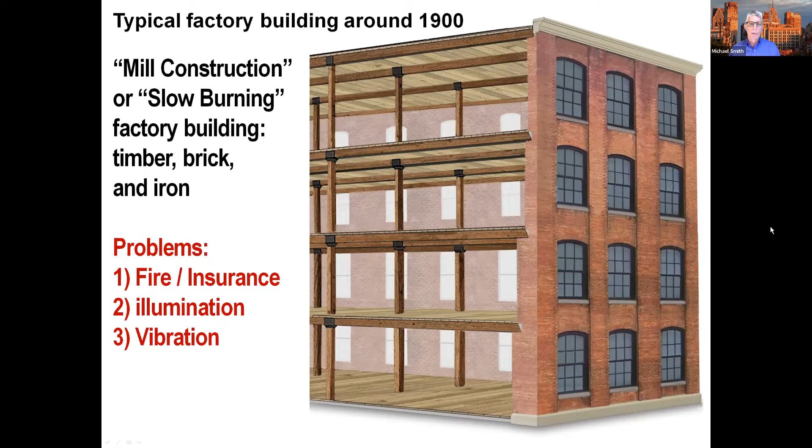So generally speaking, you had a very inefficient type of structure at a time when the industrial productivity of the country was rapidly increasing. Now, to give an example, this is the Michigan Stove Works building, constructed in 1890. It was a very typical type of structure that was used for industrial production at the time, around 1900.

It's a mill construction building with exterior brick supporting walls and an interior framework of timber and wood, wood floors, wood joists, and so forth. It was not the most efficient building, but it generally was a function of architecture at its time. And I should also mention that Michigan Stove Works was the largest stove manufacturing company in the country, if not the world.

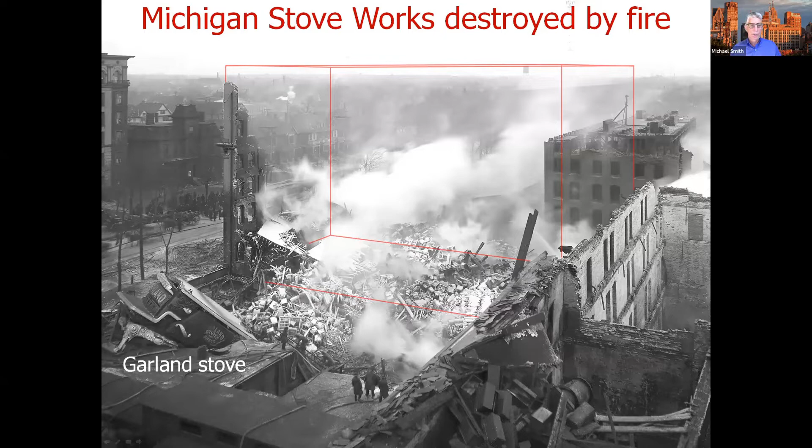Now, not long after the building was constructed, it was deconstructed. As you can see here, the massive building that you saw on the previous slide has been really reduced to not much more than an angular piece of brick from one corner of the building jutting up.

And also, if you look over here on the right, you can see a second building that's been gutted. And in this case, gutted is literally the correct word for what's happened to this building. All the timber within the building and everything else that was in the building has been burned out and turned to ash. So that was the essential problem faced in the early part of the century.

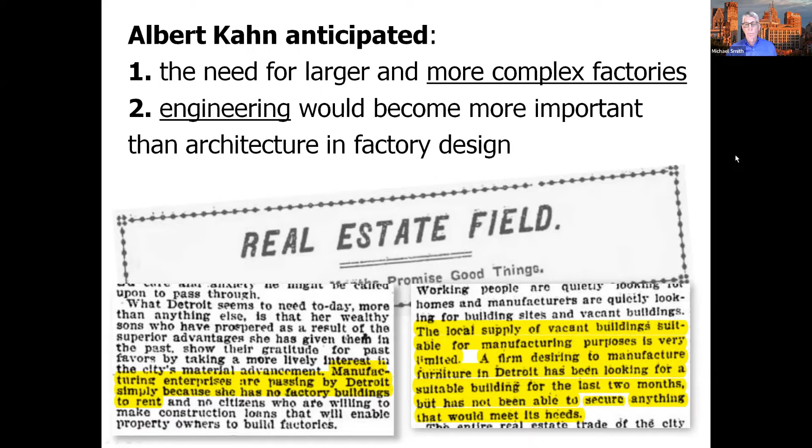And in an effort to get out in front of that trend, and both to avoid being pushed to the side by engineers and to acquire much more profitable business in designing factories and industrial type complexes, he did something that was relatively unprecedented. He hired, or I guess I should say more accurately, he partnered with his brother, Julius Kahn, a very skilled and experienced civil engineer.

Julius, unlike Albert, was able to attend college and acquire there a degree in civil engineering. He was able to do that in part because his education was financed by his brother, Albert. After leaving school, he spent some years working for a bridge company and I believe the Brooklyn Naval Yard. And then he spent a couple of years in Japan as a manager of a sulfur mining company. So he acquired not only business skills, but a great deal of experience in the engineering of steel structures, which he was quite skilled at doing.

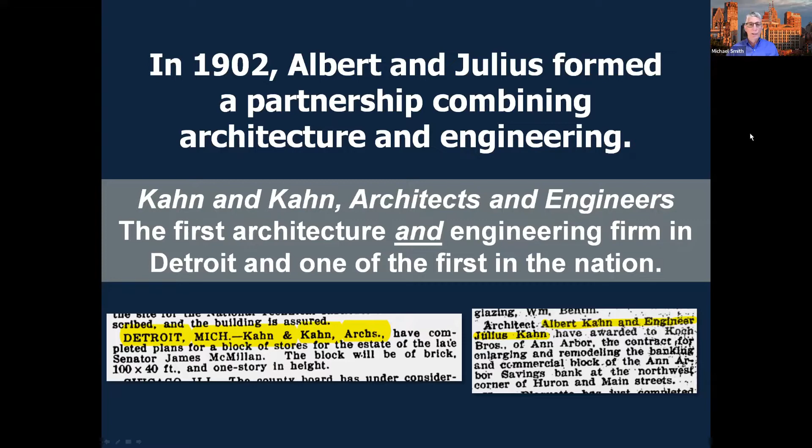So in 1902, Albert, envisioning that there'd be a place for a firm that combined both architecture and engineering, invited Julius to partner with him and form the firm of Kahn & Kahn, Architects and Engineers. And this was an important development because it was the first firm in the city of Detroit to combine both architecture and engineering. It was also one of the first in the nation. Generally speaking, architects didn't have engineers on staff. They would job out or hire from engineering consulting firms the expertise that they needed. So Albert had now under one roof the ability to both design buildings and to engineer factories as well.

The first major job that the two brothers secured was a factory that was actually quite significant. They had done work for the owners of the Packard factory prior, and as a consequence, were able to secure this commission. Now, what separated these brothers from many other architects was their understanding, their insight into the significant needs that manufacturing companies had. They needed the factories to be constructed quite rapidly so they could get into business manufacturing quickly in a very competitive environment.

That was extremely important. The buildings had to be low in cost because often they were replaced before they wore out. The maintenance and particularly the insurance and fire insurance costs had to be as low as possible. And the efficiency, the production efficiency had to be seen to in a very significant way. In other words, the less handling of materials, the less amount of labor needed by the manufacturers, the lower the cost of manufacturing would be, and consequently, the more profit or the lower price the manufactured product could be sold at.

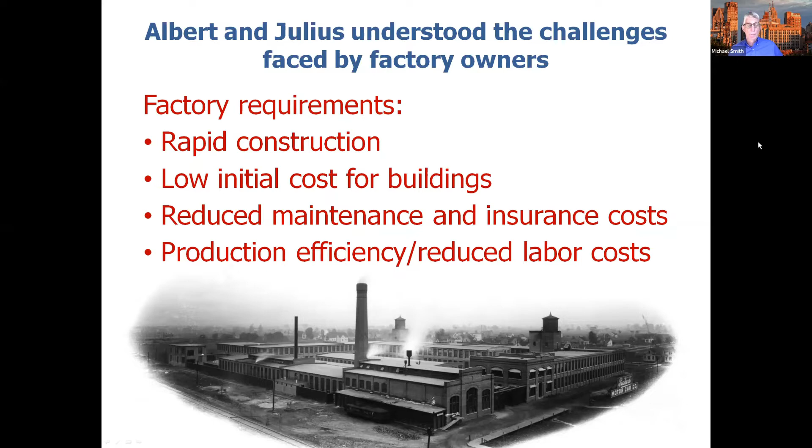The two brothers combined in designing this new Packard factory in a period of about 3 months, and they did a superb job of designing this factory. It was written up in a number of publications, both for the speed with which it was designed, the extremely low cost of the insurance, particularly the fire insurance, that was facilitated by the nature of the design of the factory. It was also designed with production efficiency in mind, that the workers, when they showed up for work, could enter the building right directly into their workstation rather than having to traipse through the entire factory and provide a distraction to other workers. So it was a very efficiently designed factory from the get-go.

And one of the interesting things that I discovered was that this was one of the only design drawings, this one that you see here in the slide, that included both Albert's name as architect and Julius's name as engineer. And the only reason that they would have done this really is to impress upon the customer, Packard Motor Car Company, that both architecture and engineering services have been brought to bear on the design of this factory, a concept that they were anxiously promoting to all manufacturers that they were attempting to get work from.

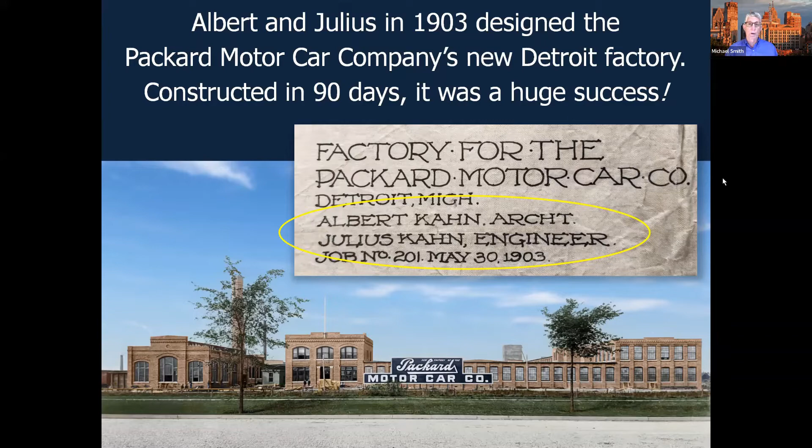But there was really nobody that knew how to install a reinforced concrete floor. So Albert hired the Cleveland Silex Stone Company to install the concrete floors. And Cleveland Silex, really their expertise was in sidewalks. And sidewalks, as you know, are typically laid on top of the ground or some other substrate that supports it from below. But in the Palms apartment building, the space between the floor joists, the concrete floor was unsupported.

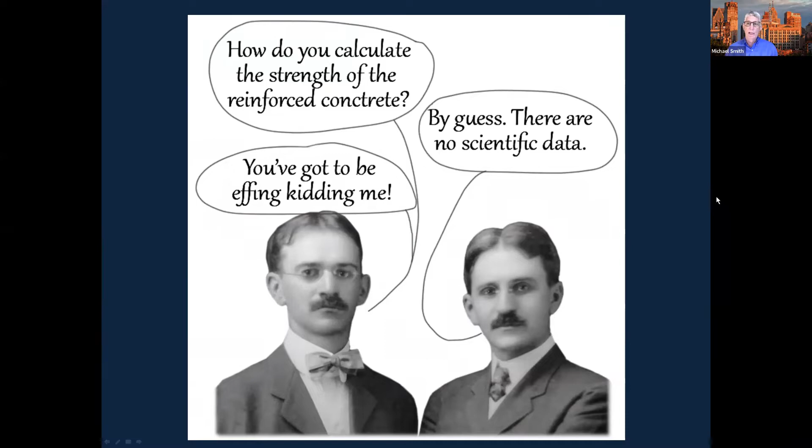So he asked his brother Albert. He said, "How do you calculate the strength of the reinforced concrete that we're using for the floor?" And Albert responded, "By guess. There's no scientific data." And Julius was just profoundly shocked by this, that you could construct something safely, you hoped, but not know exactly how safe it was.

Now, that set Julius loose on an intensive study of what was known about reinforced concrete at the time. And what he discovered was that you could build with reinforced concrete, as was the case. There were a number of architects and engineers that were building with reinforced concrete, and they were doing so by placing these steel rebars within the concrete. You can see this twisted bar here, which was the type used by an engineer by the name of Ernest Ransome.

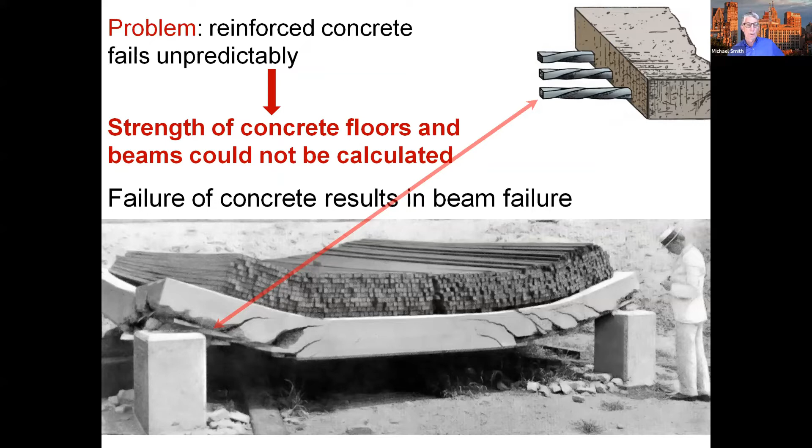And when these bars were tested by Julius, you can see the bar here. The bar has not snapped, but the concrete beam and floor has collapsed. And it's collapsed because of these cracks that have propagated up through the floor. So there was no way to calculate the strength of the floor because there was no way to calculate how strong the concrete would be before it cracked and tore loose from the steel reinforcing bar. So that was one of the problems that Julius foresaw that he had to solve.

Now, here's how he went about solving that problem. He understood, as everybody did, exactly how a beam functions when it's placed under a load, or when weight is placed upon the beam. What happens is the top of the beam is compressed and the bottom of the beam is stretched. As you can see with this drawing, it's maybe difficult for you to picture, but take my word for it, that's exactly what happens. Concrete can't stretch very much, so when it's forced into a position where it has to stretch, it'll begin to crack, and those cracks will at first be microscopic, but later on they'll become quite visible, and ultimately it'll lead to the beam failing.

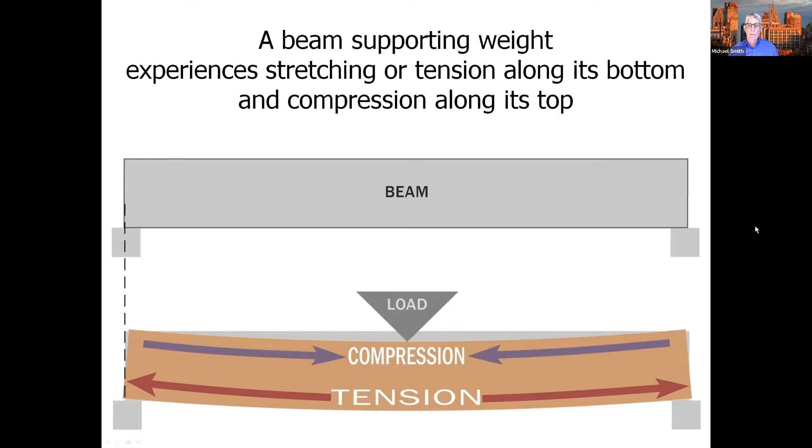Now, Julius, having worked extensively with steel structures, bridges, trusses, buildings, anything that could be built with steel, typically was often going to use a steel truss. And a steel truss is a girder or beam-like structure that's built up from a series of triangles, triangles being a very sturdy geometric figure that doesn't even need to be firmly attached at the three corners in order to maintain strength. Now, in a truss construction like you see here, the red parts of the steel are going to be in tension, like you saw on the beam, and the blue parts are going to be in compression, again, just like you saw in the beam.

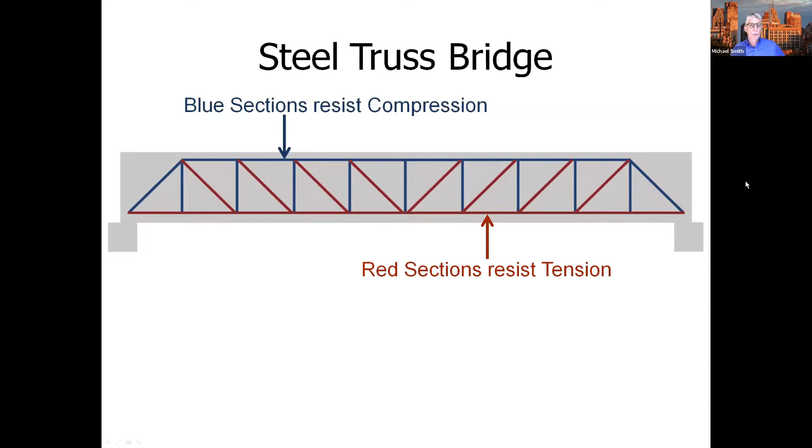So Julius imagined that you could take a truss like that, you could place it inside of a concrete beam, and the concrete beam obviously would be just as strong as the steel truss because it had the steel truss contained within it. He also realized that you could dispense with all of these blue parts of the beam because they're in compression. And because the steel is completely surrounded by the concrete, it would be able to absorb all the compressive stresses that are being placed on the beam. So you could do away with that section of the truss.

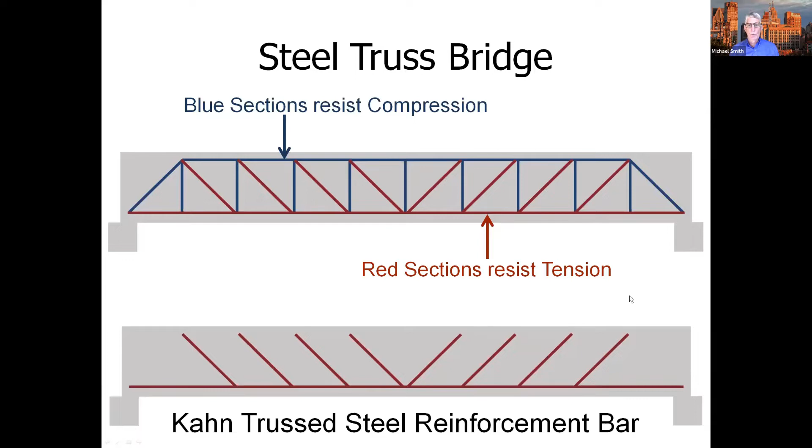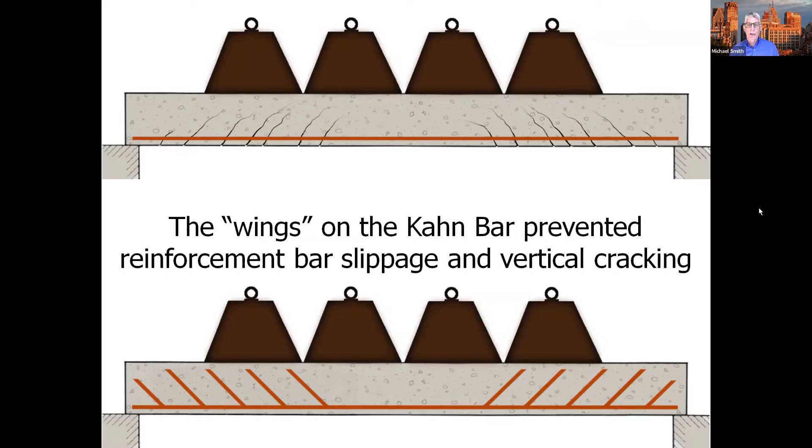So Julius then proceeded to test this theory out by building these combination beams and floors. And every time he piled the weight on top of the beam until it failed, it always failed right in the middle. And it failed not because the concrete cracked or broke, it failed because the steel that was contained within the beam reached the maximum stress and then snapped in half in the middle of the beam where the stress is the greatest.

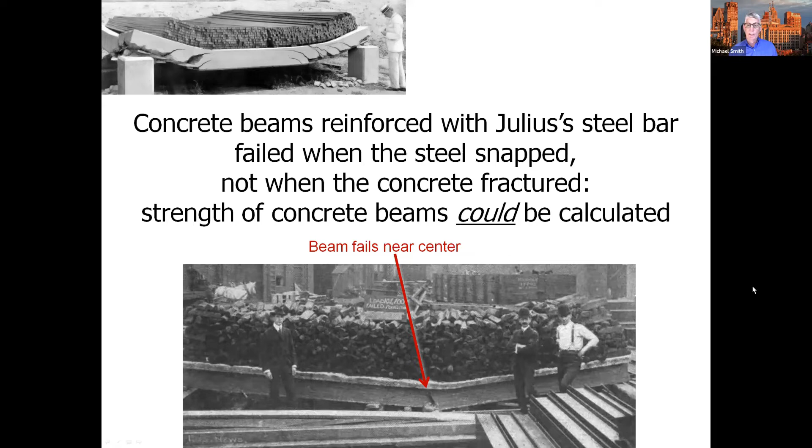And that meant that the weight that the concrete and steel beam could bear could in fact be calculated because the strength was based on the maximum strength of the steel, not on the point at which the concrete would crack and break apart. And as you can see right here, you have a very happy Julius Kahn, pleased with the fact that his theory has been borne out.

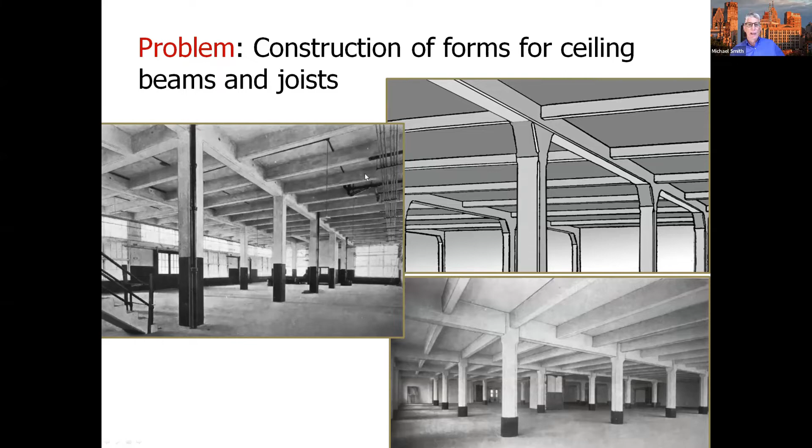Now, there was a second problem that Julius set out to solve, and that was the problem of building the wooden forms that would contain the concrete while it was curing and hardening. And you can see that all of these girders and beams and joists that had to be included that would contain the reinforcement bars, that would entail a great deal of form work.

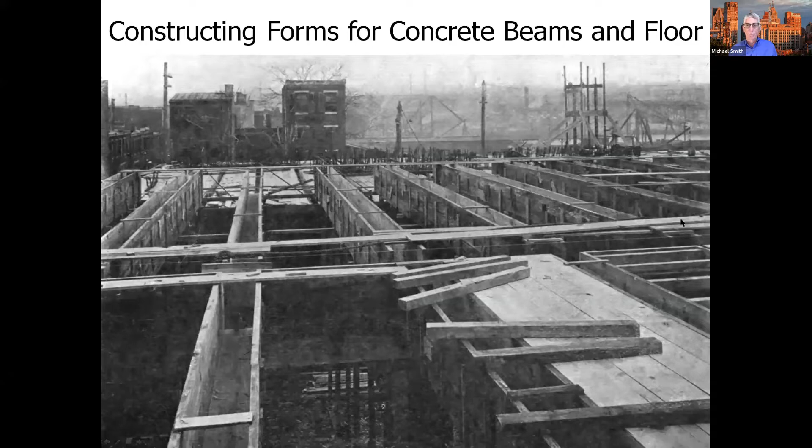So you see all these wooden forms that had to be constructed by many carpenters and used an enormous amount of timber to construct them. And it was essentially the greater part of the expense of building the concrete structure. And so he sought a way to eliminate all this wooden form building. And what he came up with was something that was quite ingenious.

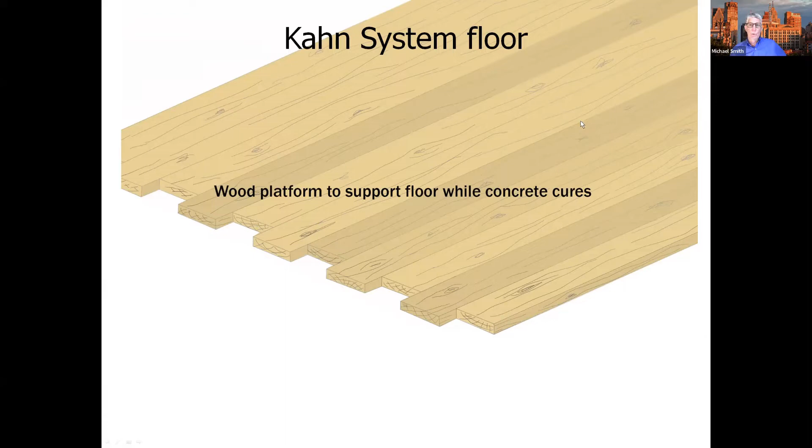Instead of building all that form work, you just simply build a platform of wooden boards like what you see here. This is in the era before plywood was invented. So it was just regular wooden planks that were laid out. And then on top of those planks would be laid these layers or lines of hollow terracotta blocks. And between each line of terracotta block would be placed one Kahn reinforcement bar.

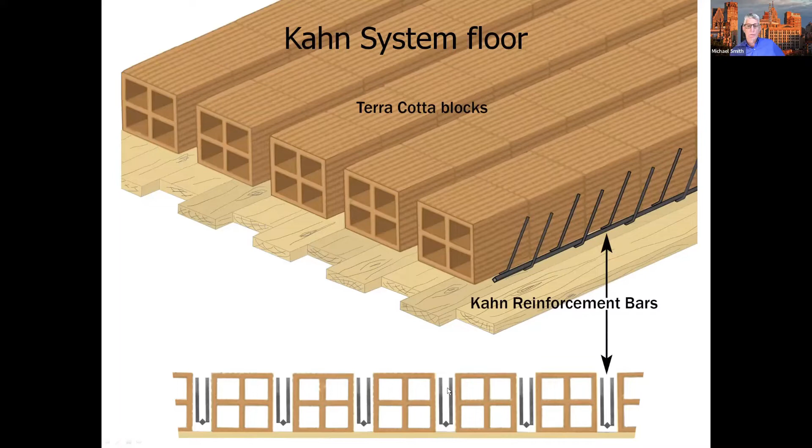And you can see in the end-on view what this would look like. You have the beams here. The floor is going to be up here as soon as you pour the concrete. And that's the finished floor right there. You have a floor with beams that are reinforced with the Kahn bar.

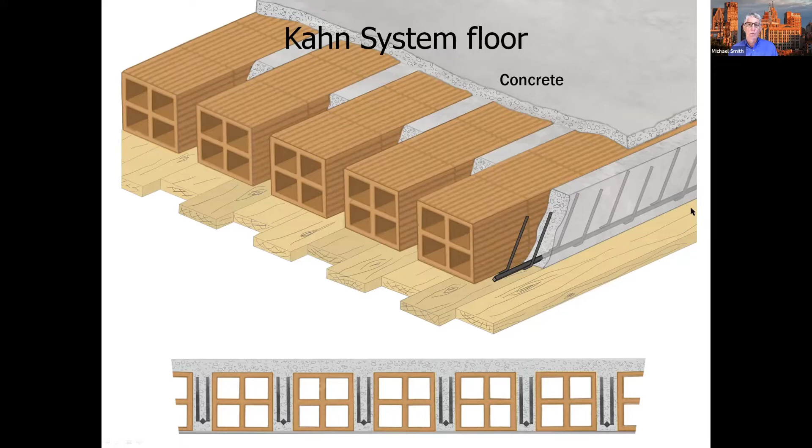So what you end up with is something that looks like this. This is a steel reinforced concrete beam. Here's a steel reinforced concrete floor. It's flat on the bottom so that it can be painted white, reflects the light that comes in from the windows to the outside. The area between the framework pieces is filled with terracotta blocks.

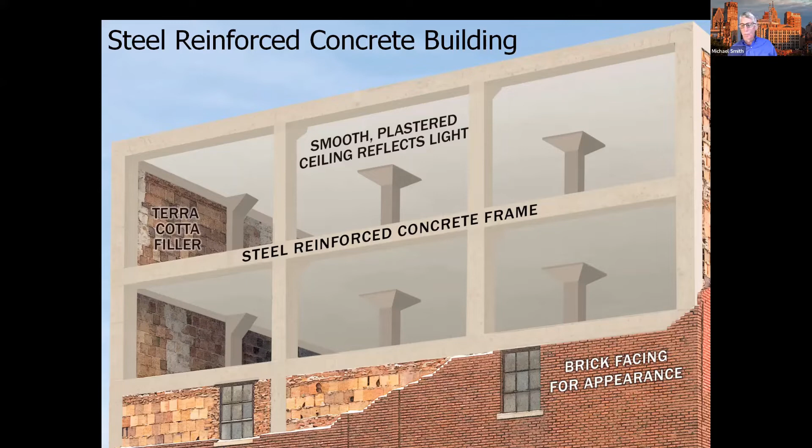And in some cases, if the appearance of the building was important, you'd have a brick facade that would be applied to it. But the bricks really were there strictly for appearance purposes. They had no role in supporting the building whatsoever.

So Julius, having patented his reinforcement bar, which you can see here in this picture, started his company, the Trussed Concrete Steel Company, in the latter part of 1903. He began manufacturing these bars and selling them to construction firms, and they were very rapidly taken up as a very superior form of constructing with concrete.

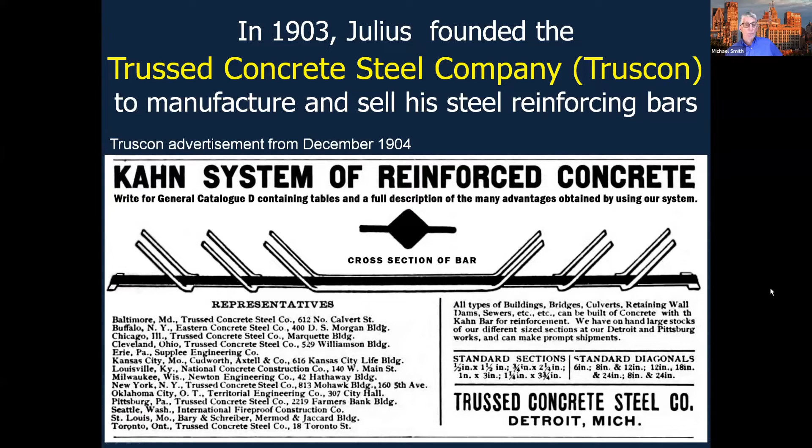And you can see this is an ad from just a little over a year after he established his business. You can see how many offices he's already established across the country, because Julius was smart enough to know, based on his work experience in Japan, that in order to prevent copycats from imitating his system, he'd have to rapidly become a nationwide company and become the leading reinforcement providing firm in the business nationally, and have a reputation for his product that would prevent copycats from getting a foothold.

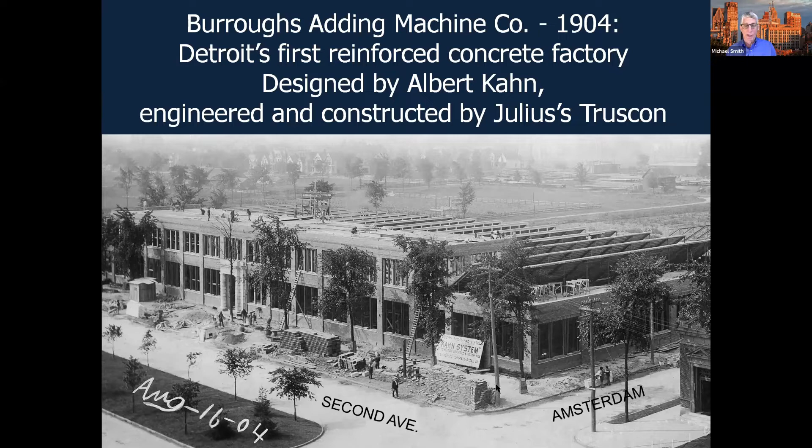Now, by 1906, Julius had established major offices throughout the country, and the purpose of those sales offices was to observe very carefully any newspaper articles about major factories that were planned to be built, and to immediately go into action to sell to these plant owners the system of reinforced concrete for their plant, to demonstrate that it was superior to the slow burning or mill construction factory, and could be constructed either at slightly lower cost, considering the savings in insurance, or at worst, the very same cost as a mill construction plant.

And in 1906, Truscon sales reps succeeded in selling to three different major auto companies the steel reinforced concrete method for constructing their plants. The first of those was for the Garford Company, which was an auto parts manufacturing firm in Elyria, Ohio, a suburb just outside of Cleveland. And Elyria did not have a major architect or engineering firm. And so when Truscon succeeded in selling them the method of using reinforced concrete, they also recommended that they hire Albert Kahn as the architect.

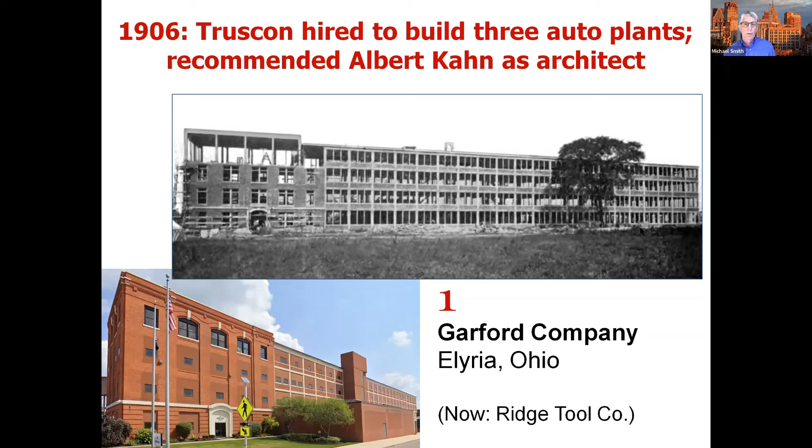And there were two reasons why Albert would be a good choice. First of all, Albert had experience building automobile factories, his work on the Packard Motor Car Company plant. And second of all, Albert was one of the very few architects at the time who had experience working with reinforced concrete. So Garford saw that as a reasonable reason to hire Albert as the architect, and therefore they did so.

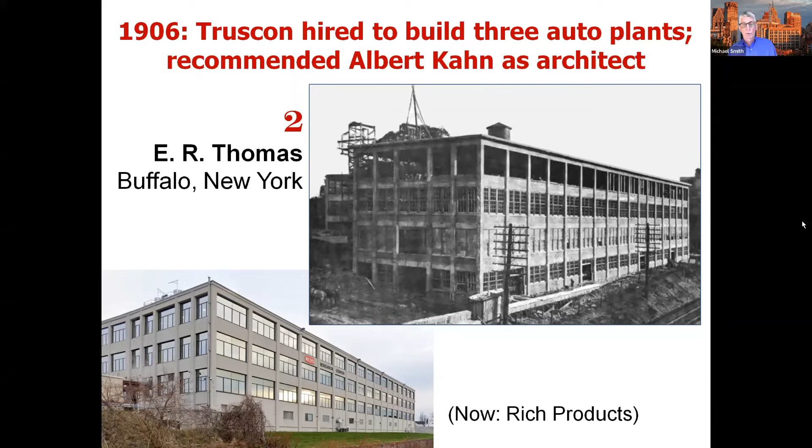And finally, the third factory was the Pierce Arrow factory, a huge factory, also in Buffalo, New York. And they initially planned to have Lockwood Greene be their engineers and architects for the factory. And just as they were getting ready to begin construction, Pierce Arrow's plant in Buffalo burnt to the ground, and they were immediately on the phone with Truscon, invited them to redesign it as a reinforced concrete plant. And they also hired Albert Kahn to come aboard as a consulting architect with equal authority to Lockwood Greene.

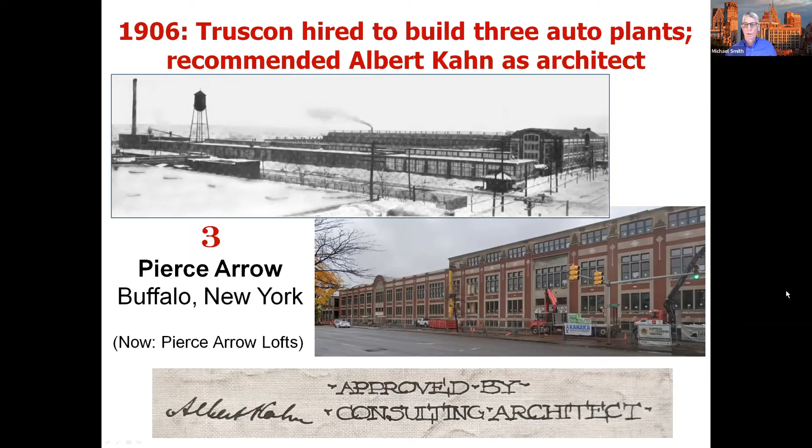And Albert was required to approve every single drawing that was used to construct the plant, whether it was a drawing by Kahn's office or a drawing by Lockwood Greene's office. And you see here one of these drawings signed by Albert as having been approved by him to use for production of the building. Now, at the same time, in 1906, the Packard plant expanded dramatically, having already constructed their building number 10 of reinforced concrete as a test bed for the process.

It wasn't the first reinforced concrete auto plant. The plant built by Cadillac on a street in Detroit was, but they added two very large buildings, buildings number 11 and number 12. And Albert was the architect again for this. And Truscon was also hired as the engineering firm and as the construction firm. Truscon was hired as both the engineer and the contractor for all four of these particular automobile plants.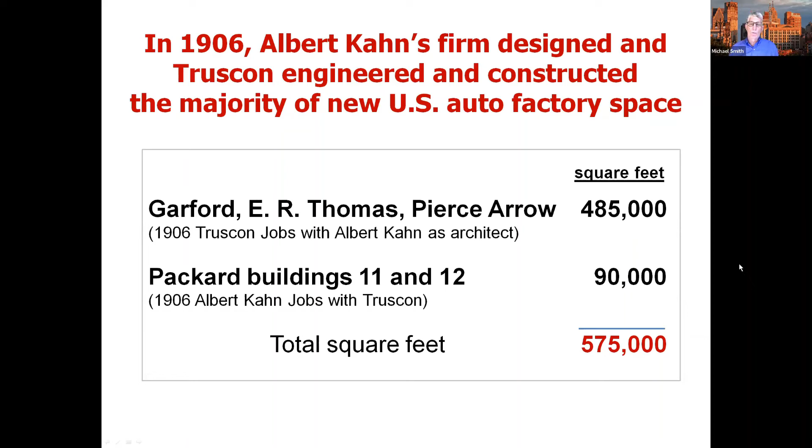So what we have here between the three out-of-state plants, Garford, Thomas, and Pierce Arrow, is 485,000 square feet of reinforced concrete automobile plant. Then you add in the Packard buildings 11 and 12, another 90,000, a total of 575,000 square feet of automobile plant space that was designed by Albert. It was engineered by Truscon and constructed by Truscon. And this was by far the majority of all new automobile manufacturing factory space in the US.

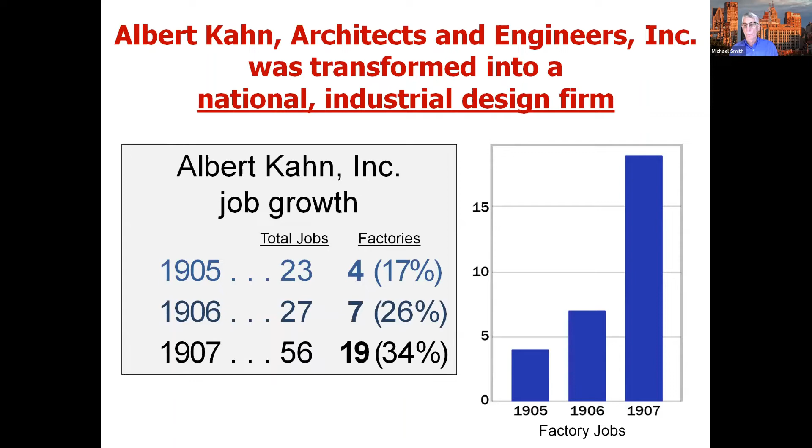Now that had a tremendous impact on the nature of Albert's firm. Albert Kahn's company in 1905 had 23 jobs total. Only 4 of those were factories. It amounted to 17% of his company's work. By 1907, the number of jobs going through Albert's office was doubled to 56, but 19 of those jobs were factories. It was 34% just by number of the jobs in his firm, and probably amounted to about 80 to 90% of his work by monetary amount. In other words, the revenue to his firm was probably 80 to 90% as a result of factories.

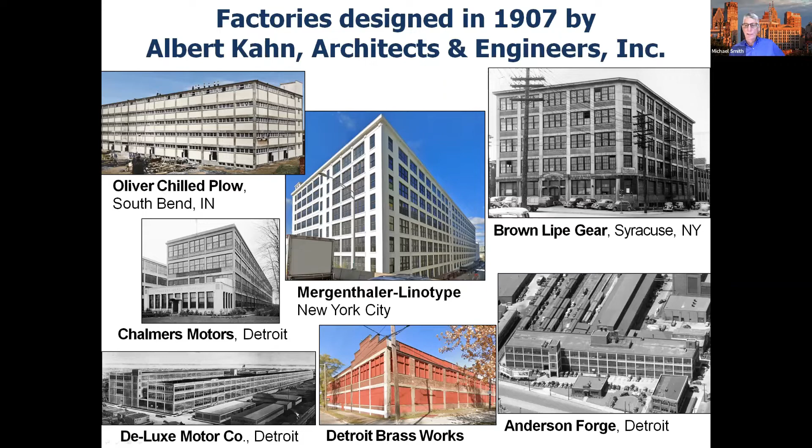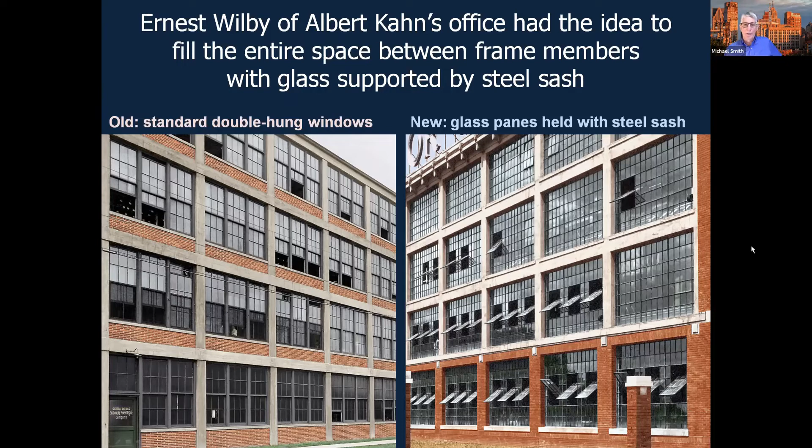And that was an innovation that came directly from Ernest Wilby, the chief designer of Albert Kahn's office. He didn't invent the windows, but he recognized that they, as a new product, should be immediately adopted for factory work.

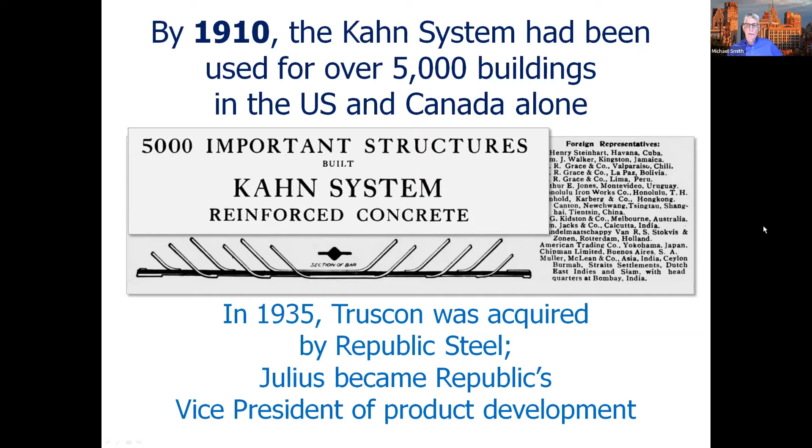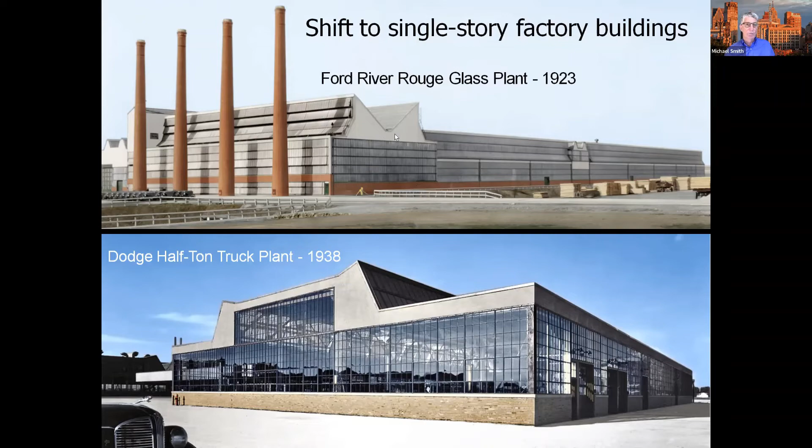But it's important to note that the design of these factories was in large part facilitated by products that Kahn manufactured. Julius's company became the largest manufacturer in the world of these steel sash windows that you see that constitute the walls of these buildings, and the end panels of these buildings are actually lightweight concrete panels constructed with a product also manufactured by Kahn called Hy-Rib.

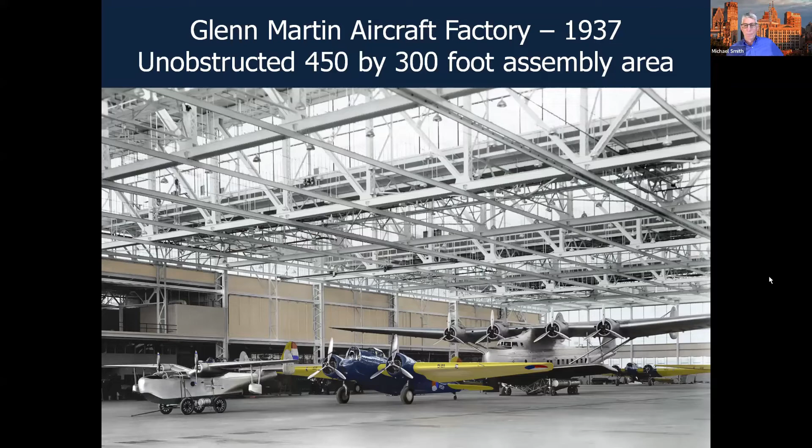Albert developed some of the most innovative plants in the country. By the late 30s, he was building massive plants that could be used for manufacturing aircraft. Here you see the Glenn Martin plant in Baltimore, Maryland, that used these enormous steel trusses to create these massive open areas that were not supported by columns. And by 1938, Albert's firm was designing nearly 20% of all of the architect-designed industrial buildings in the United States.

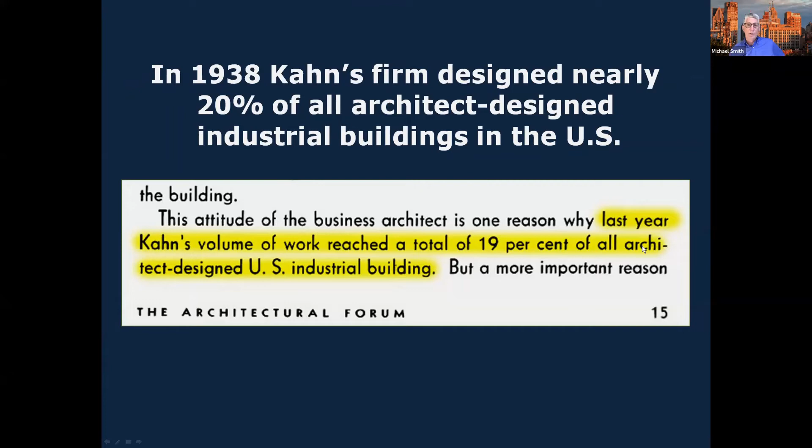The onset of World War II was a tremendous era of manufacturing building going on in order to provide the war material that was required by the US and other countries. The Detroit Arsenal plant in Warren, Michigan was constructed in a matter of months, and before the building was even completed, it was turning out tanks and constructed tens of thousands of tanks that were used by the US and the Allies during World War II.

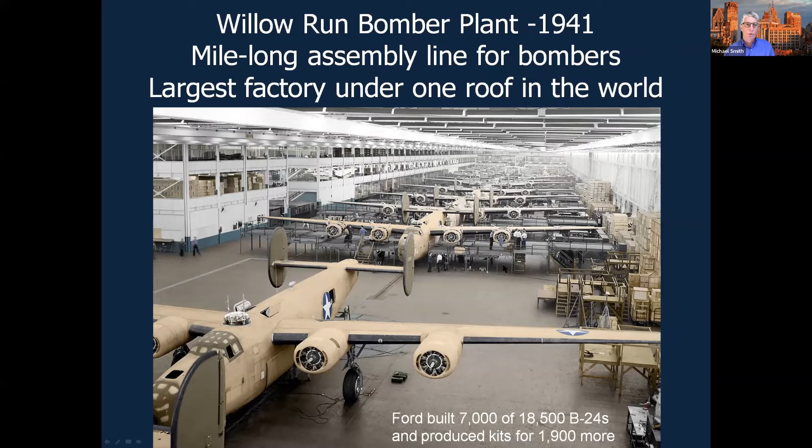The largest plant under one roof in the world was the Willow Run plant that was designed by Albert and utilized an enormous amount of steel material manufactured by Kahn. It was a unique plant in the sense that it was a dark plant or a blackout plant that had no windows, so it could operate 24 hours a day without giving its location away to the enemy, perhaps seeing light coming from the windows in the event that the US came under attack from bomber aircraft. And so lighting was provided by these fluorescent fixtures that were used for the first time on a massive scale in this factory.

Julius passed away during the war, November 1942, and just about a month later, Albert passed away as well. It's rumored that their high living style and risk-taking, smoking, drinking was what led to their death. But there's no truth to that at all. It's just that the family had a history of hearts that, when put under stress, tended to fail due to heart disease, and that's how both of these men died.

Now, there's one more thing I want to tell you about that I think will clear up some confusion. Sometimes people mistake these types of columns, mushroom columns or martini glass columns, as being some form of a Kahn-designed reinforced concrete structure, which in fact they're not. This type of floor, which had no beams required, was actually invented by Claude Turner, an engineer who designed and built the first buildings in the latter part of the first decade of the 20th century.

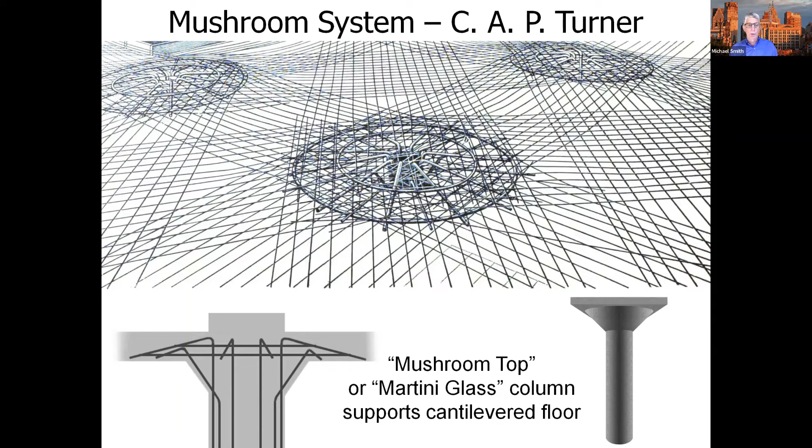And then as a result of some patent confrontations between Turner and some others who claimed to have invented something similar, a lot of different reinforcement supply companies invented systems that are very similar but did not infringe on the Turner patent. So you'll see a lot of different buildings that have this type of martini top column, sometimes with and sometimes without a drop panel above it, to be used for a flat slab floor. So it doesn't necessarily indicate anything having to do with Albert Kahn. By 1911, 1912, Truscon had developed a unique system for this type of flat slab floor, and so they often constructed buildings that had a very similar looking type of column.